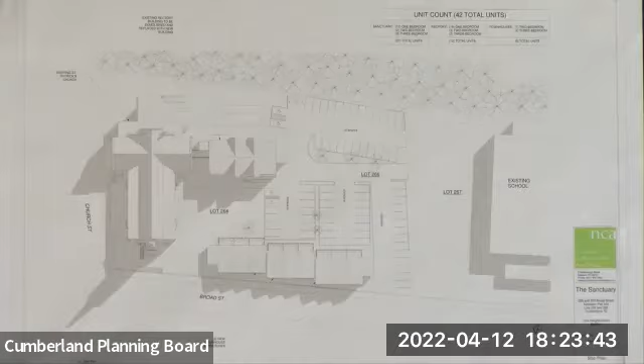So we came and looked at the church. Well, let me back up. Newport Collaborative has been in business for 41 years. We're historic restoration specialists. One of the projects you'd probably be familiar with is Ashton Mill, where we took a really derelict building and turned it into a couple hundred units, which I'm very proud of because it's now become part of the Blackstone Valley National Park. I think that's really a real accomplishment for Cumberland, to have something as part of their history saved and part of a new national park. So I'm very proud of that project, but we also do lots of projects all over the state, most of them with a historic bent, because that's our background and what we do is historic preservation.

And I have already done a church conversion. We converted the St. Bernard's Catholic Church in Wickford into affordable housing. There we took the sanctuary and the rectory, did a connector in between them, and made one larger building that has, I think, 48 units of affordable housing for North Kingstown. We've done many other church conversions too, so I kind of look at them as really beautiful placeholders within the community, important visually and spiritually. People have grown up there and looked at the building for many years, and so if we can keep it and somehow make it work, we'll do it.

Now, if we were starting from scratch, would I make affordable housing look like that building? No, because it's pretty tall and there's a lot of volume. So I'll walk you through the plans in a minute, but what we've done is inserted a floor inside the church. We're going to add a floor inside, because it's big vaulted spaces, big Gothic spaces. So we're actually putting a floor in, at the entry part of the building.

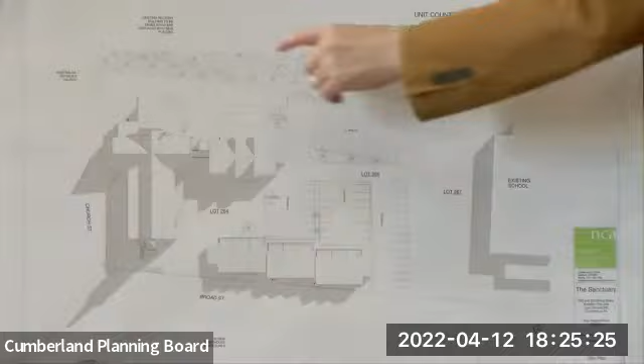Let me start over, I'm jumping ahead. I'm supposed to be looking at the site plan, which is the board over here. So the sanctuary building will stay exactly as it is, with no additions, no changes.

Or I can. Okay. Does that show up? Okay.

So the church will remain exactly as it is. This is where the rectory sits today. Currently, the rectory is 2 stories and 1 story.

The way it's constructed right now, it's not really well laid out and easily adaptable to our affordable housing units. So we're going to take it down to the first floor level and rebuild up from there. We're going to keep the foundation because it's all steel framed, concrete walls, steel framing and everything. It's really well built.

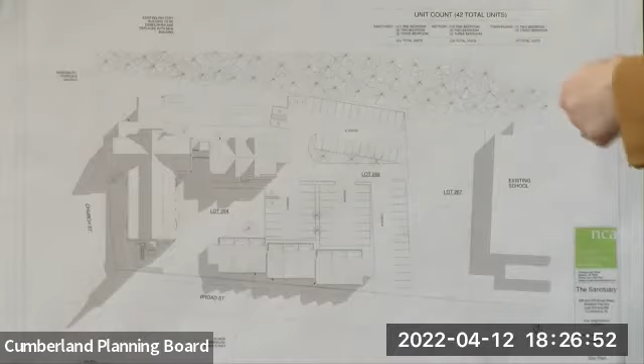So basically we'll just be building up from the first floor and going up. We'll be making the rectory building the same footprint as it is today, but it'll be 3 stories instead of 2 and 1. That's how we get a little extra space and make it work. It also makes it look better. You'll see in a minute when I show you the outside views.

And then lastly, we're adding units out right along the street. They're basically replacing a bunch of garage and shed buildings that are at the back of the property. We're going to take those down and do our construction up at the street.

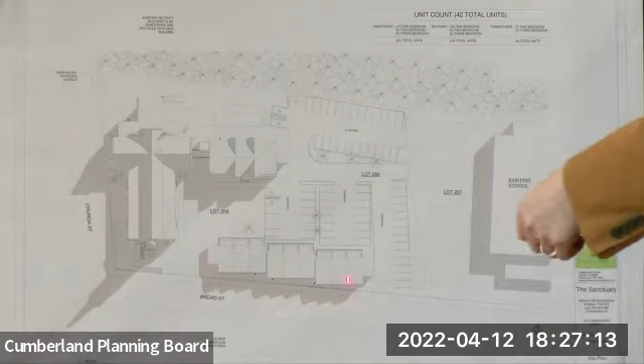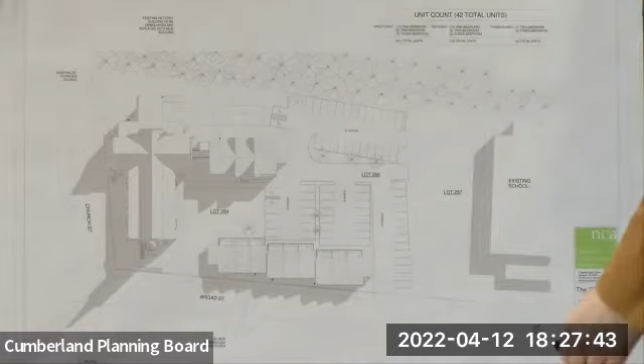The reason we're doing that is we think it makes a better streetscape to actually have all the buildings along Broad Street line up right on the street and have their stoops right out on the street. So we're basically trying to keep that rhythm of what Broad Street was before, before buildings were taken down. We're trying to put back the buildings almost the way they would have been in the past.

So we've placed the buildings up along the street. They're not right on the street. It's hard to see because it's in the shadow, but there'll be little terraces right along the street, like a front yard to sit and look out onto the street.

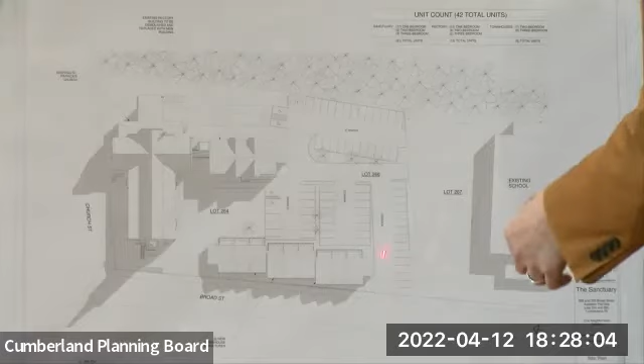And this is an existing curb cut, and you'll be coming into the property, and all the parking then will be kind of hidden behind the townhouses and back here behind the other buildings. So when you're driving down the street, you really won't see the big parking lots the way you see it today. And then just for reference, this is the existing school over here.

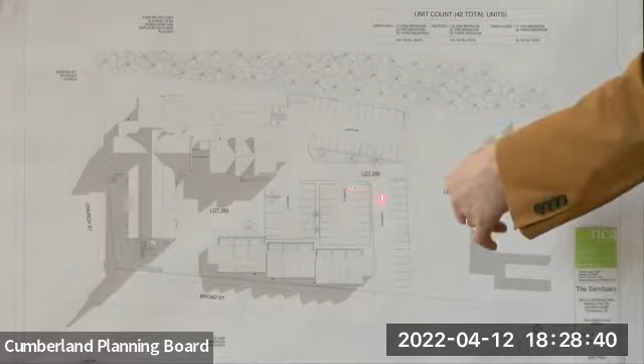There's a little confusion about lots. Right through the middle of the parking lot is a property line. There are actually 2 lots that make up the church property. So we would be combining lot 266 and lot 264 into one. Right now there's a property line that just goes right through the middle of the parking lot, so we'd be combining those 2 lots into the one larger lot that all of this would sit on.

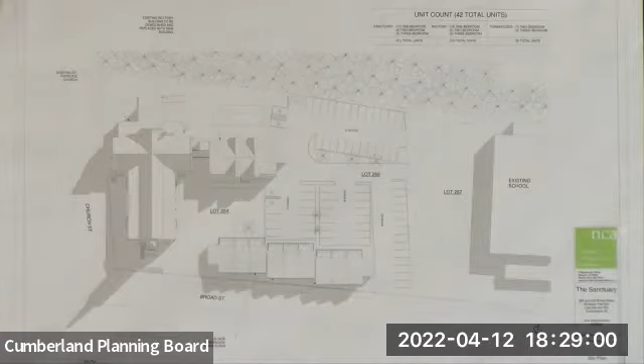My boards are back here. In the same spot. Yep. So as I said, the

Church will remain just as it is. We're not going to do any bump outs or anything. It'll stay the same. Here's the rectory building.

We are making a connector between the rectory and the sanctuary. That's done so that the people living in the rectory can go into the church and use the public spaces and amenities that are in the church, and vice versa. The people in the church will be able to go into the rectory, because we're going to have the whole lower level of the rectory as a common space, the way it used to be part of the common space for the parish in the lower level.

We'll be keeping that and using that room. People will be able to go back and forth no matter what the weather, primarily because the elderly will probably be located mostly in the rectory building because it has the elevator. So having this little connector here so they can go back and forth makes it work for all seasons, so they don't have to go, like if we're having Meals on Wheels or something in the sanctuary space, the people here can just walk over without having to get dressed and go outside.

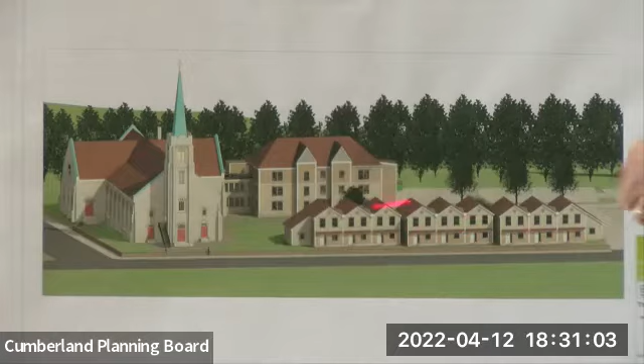So it's programmatically important to have this little hallway that connects the two buildings. That's really important for us. And then these are the townhouses that go out along the street, and what they do is hide all the parking. You won't see it, and hopefully the townhouses along the street will provide a new street edge the way the existing buildings along Broad Street are currently oriented.

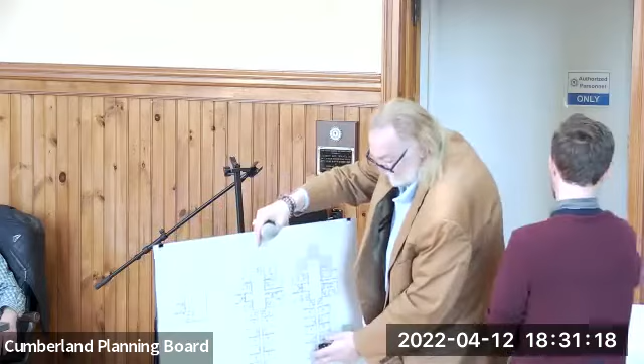So this is the sanctuary building, and we do have one unit in the lower level and storage. The rest of the basement is unexcavated, just a crawl space. So there's really very little space in the lower level of the sanctuary.

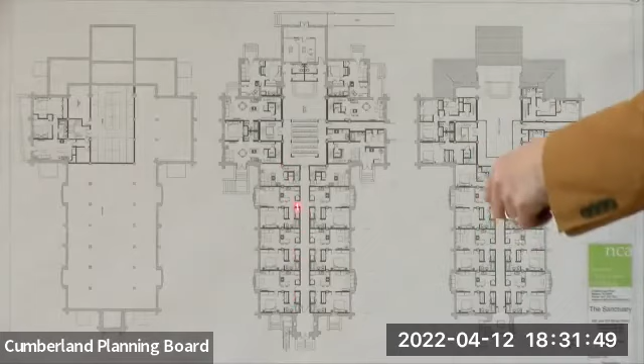So most of our units will be on the first floor and the new second floor. The first floor will have units all down like the hallway. We'll still be preserving a community space right in the middle where the altar was, so we'll have an open room that can have seating. We can have meetings in there, some lectures, some little concerts, and some meals for our residents.

Here's the altar, it's important. We kept it, so the rear wall is still there with the big rose window. That'll still be part of the public space, so you'll still be able to see that. When you walk in the church and look straight down, you'll still have the experience of that large open space, the vaulted ceiling, the stained glass at the end of the hall.

At the rear, in the one story which used to be the sacristy, is going to be our offices, our rental office and our management office. We'll also be putting a ramp on the back of the building to get up and into the church, because we have stairs right at the front entry, at the steeple, and at the two side aisle entrances, big stairs. So we'll be coming in with our ramp at the rear, and that'll provide our handicap access.

So we basically have 10 units on the first floor, and we're creating a new second floor. If you've been in the building, you know there's an organ loft when you first walk in, a whole floor right at the front. So we're basically just extending that floor up. You'll be able to imagine that the organ loft will just be extended down each of the aisles, so the big vaulted spaces in these side aisles will all still exist. Those will just be part of your unit. Some lucky people will be in there and look up and have Gothic arches inside their apartment.

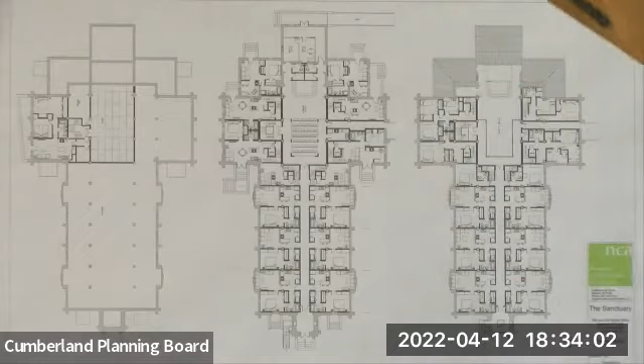Some lucky people will be able to have that wonderful experience of the Gothic interior, because we don't want to rip it all out and put in drop ceilings and all of that. So we're basically keeping everything inside and out. The big vaulted space in the middle, you'll still have that experience when you walk in, and we're preserving that in this community space in the middle.

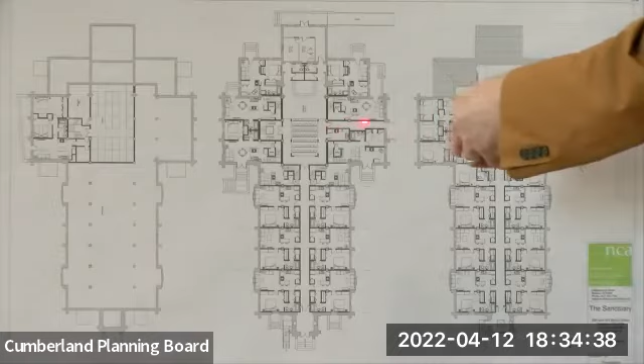And then right here, the little hallway connector is what goes over and connects to the rectory building. It's very small, we're not putting in any units in that little connector. It's just a hallway so you can get from the rectory over to the sanctuary building. We have public restrooms, laundry facilities and things, so people will be going back and forth and using the property as one property.

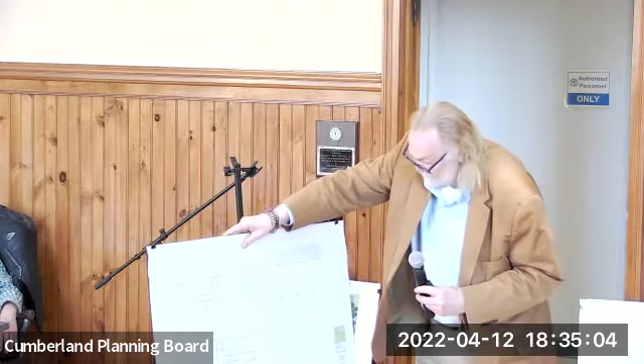So this is the rectory building. Here is the lower level, or the basement. We're going to keep it as our big common room, kitchens, laundries and things all down here. Here's our new elevator that we'll be putting in, and here's the little hallway connector that goes over to the church. You can see it here too at the first floor level, just a hallway and a fire stair right there.

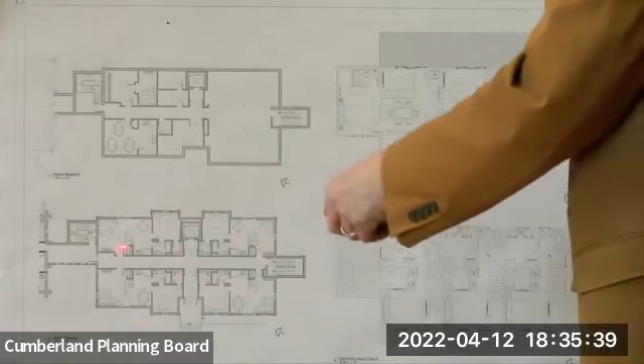So the rectory building gets newly laid out, 4 units per floor and 3 floors, so that's our 12 units inside the rectory building. And then here are our townhouses, which we've designed as 3-unit configurations, so there's three units to make up the 9 units. Two of them are 2-bedroom townhouses, and the end one is a 3-bedroom townhouse.

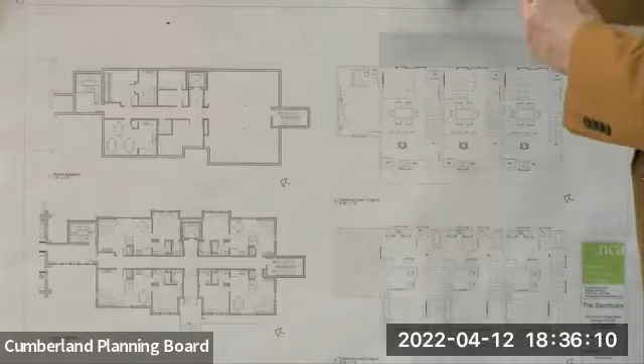We didn't mention that in the sanctuary, but we have 1-bedrooms, 2-bedrooms, and 3-bedrooms inside the sanctuary, so we have a real mix in there. And in the rectory, we have 1s and 2s, and then the townhouses along the street are 2s and 3s.

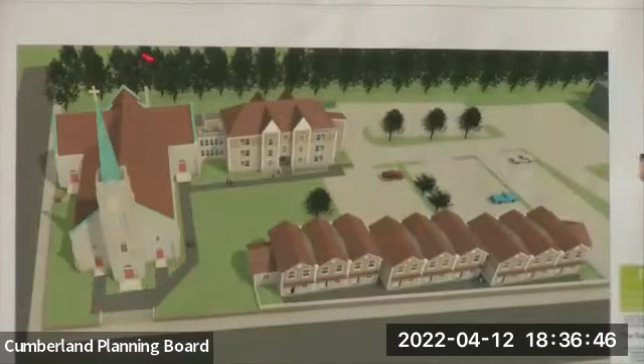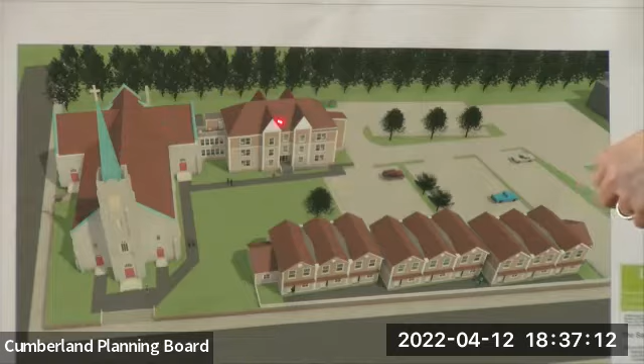So again, we're back to the view, and here's the sanctuary building with the little connector. Here's the rectory building, where we're adding height because we've gone up, and we're putting on steep gables so the pitch matches the church, making it look like one property. Then here's the townhouses in groups of 3, 3, and 3, staggered along Broad Street.

So that's kind of it in a nutshell. If anybody has any questions that I can answer, or I can come back up later after you've heard other people, that's fine.

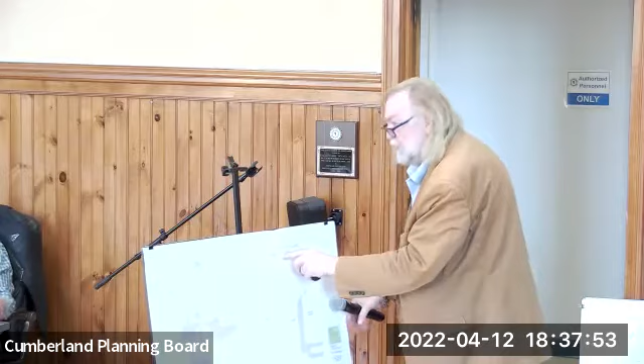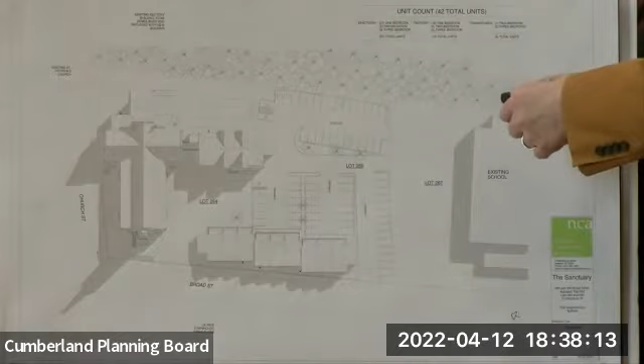Can you just go over how many single units, how many 1-bedrooms there are? If I can get the site plan again - you can just give me the total number, you don't have to show it. In your packet, on the site plan sheet, right at the top is our unit count. Can you see that in your packet on your site plan? It just says site plan. Should be right at... no, like the next page, just a cover sheet.

So the breakout is: in the sanctuary there's 16 one-bedrooms, 3 two-bedrooms, and 2 three-bedrooms, so 21 units inside the sanctuary building. Then the rectory has 10 one-bedrooms and 2 two-bedrooms, for 12 total. And then the townhouses are 7 two-bedrooms and 2 three-bedrooms. So all told, we have 42 units. Do you need me to repeat those numbers?

Okay, any other questions? Mr. Butler?

I remember several years ago when we toured the Ann and Hope building, they were starting to look at the residential, and they talked about the importance of windows. I can see there's lots of windows in the rectory building and the townhouses. I was wondering about the church itself - I know there's lots of stained glass windows. Are those just going to be popped out? They've already been removed, except for the rose window and a couple others. The rest have been removed, so we have slots, and the problem is they don't open properly, so we'll be putting new windows inside those slots. We're not going to make them bigger or wider - we're going to live with it.

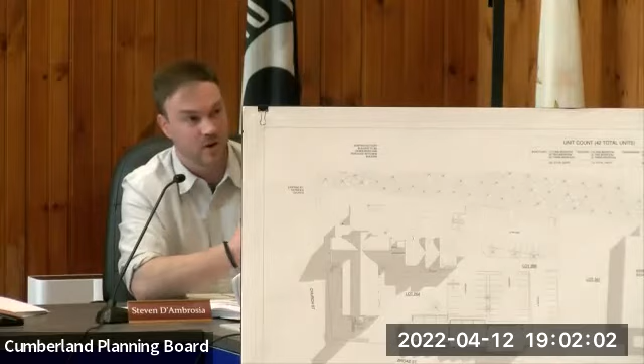I do appreciate, however, the idea that you have this row of townhouses. It's different from your opinion, respectfully. It's important to maintain a streetscape, a certain feel of a neighborhood, and not make something drastically different. For years we've been seeing this large open parking lot space, it's an eyesore. Framing that with townhouses, I think, is a good idea.

I would be interested to see how the development of the design of those townhouses goes. I know oftentimes townhouses look very repetitive. The renderings we're seeing, each face of the building is exactly the same as you go down, and they're all tan and beige right now. I know it's low-income housing and sometimes there are limits to funding and what you can do architecturally, but I think it would be a worthy consideration to look at different materials, colors, and layouts so that it's not a static, repetitive pattern as you're traveling from this nice architecture on the corner.

I'll respond briefly, and maybe Michael can comment too, but there are some really great architectural materials being used in affordable housing, in fact any housing. It's the same material we're using on affordable housing as on any other housing, lots of different colors, lots of different textures, and I'm sure the design Michael ends up coming up with will be very attractive and not as linear as you might be imagining. We're very sensitive to that. Part of our design review process with Rhode Island Housing is they look at things like that as well, and they often offer a lot of feedback on how they've seen other things done in the past in order to mitigate the sterileness of the front of a building face.